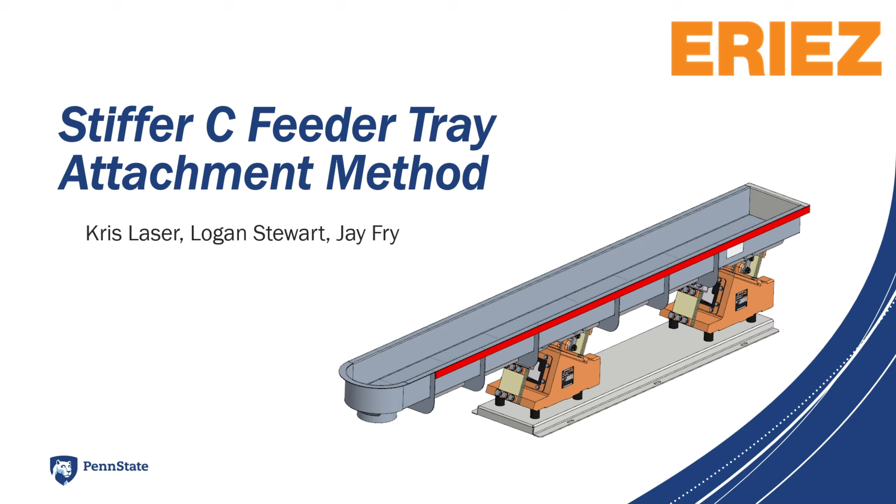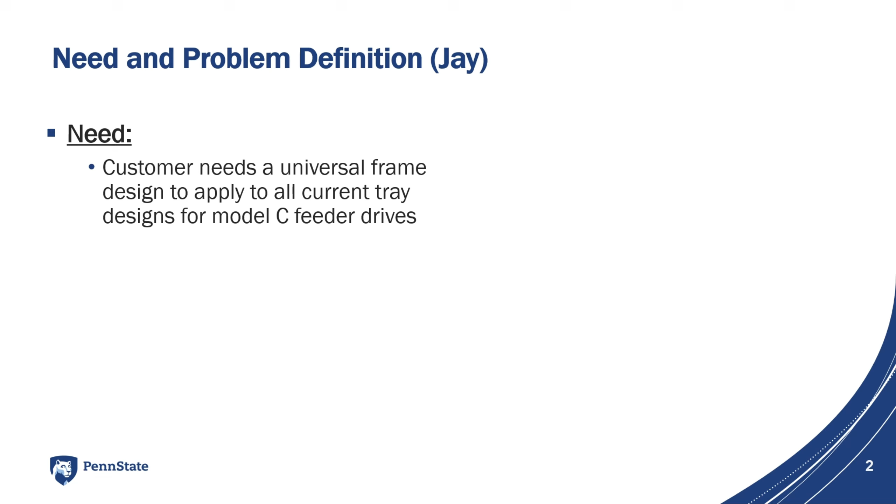The problem is that because the tray frame geometries vary, depending on the feeder, certain tray configurations end up with natural frequencies near that dangerous resonant peak. Each case requires individual engineering attention, which drives up labor costs and redesign time.

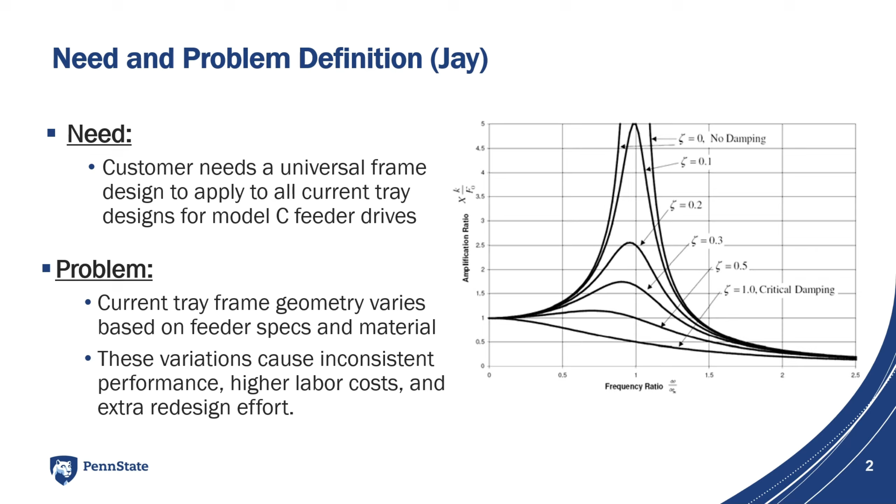The Model C feeder is an electromagnetic drive system. It uses an alternating current system to move particles or material to a specified place in a smooth but linear way. There are no belts or rotating parts, which is very important because it allows for little to no downtime due to maintenance. There aren't really any parts on the system that can wear out over time with use either.

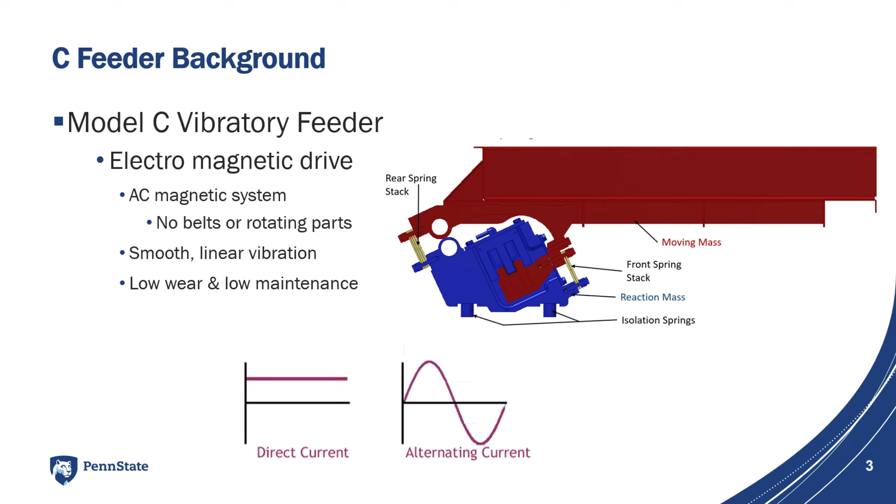Some things to point out on the picture to the right are the rear and front spring stacks. These springs are small sheet springs that are used to tune the feeder, in this case to 60 Hz. The tray itself is the large red piece on top of the blue drive. As shown in the animations below, the material moves in a smooth, linear consistency down the tray attached to the drive. The vibration is excited by using magnets inside of the drive that flip their polarity. This flip is what keeps the vibration smooth, thus allowing proper material flow.

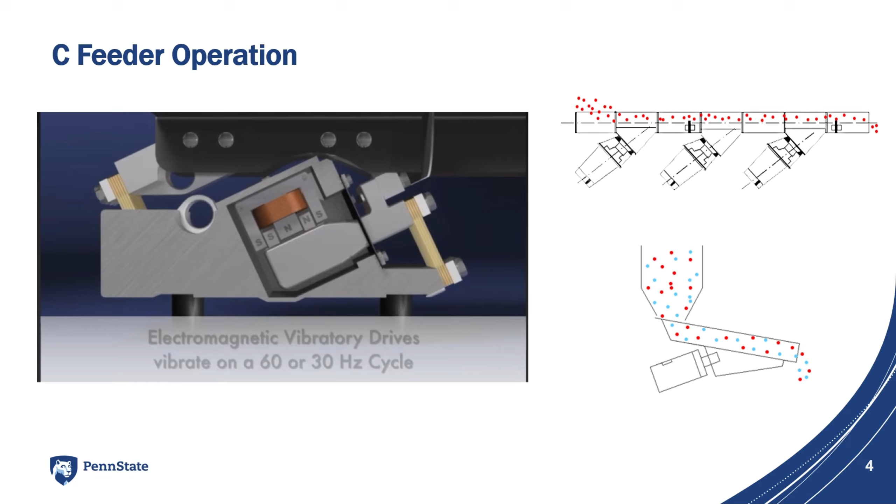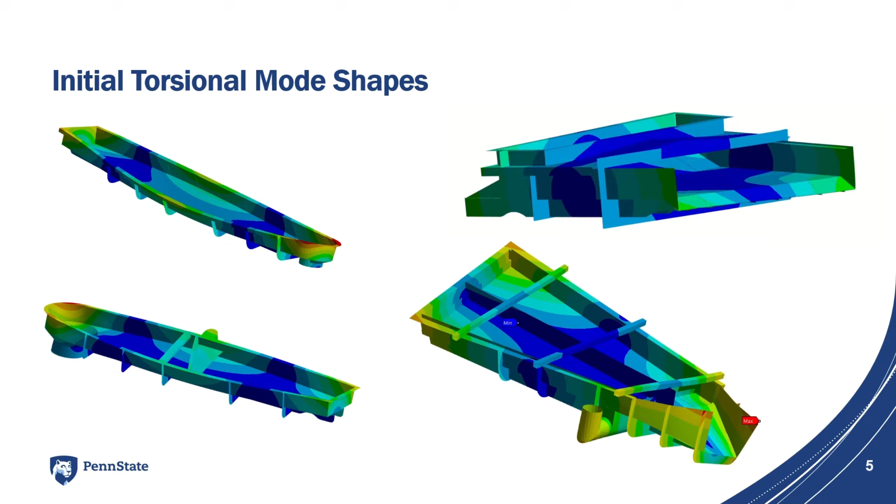As previously discussed, the primary issue identified in the original designs was that torsional modes were the main contributor to resonance. These modes occurred near the operating frequency, leading to unwanted twisting behavior. To address this, we introduced square tubing along the length of the tray. Because this tubing is a closed cross-section, it significantly improves torsional resistance compared to the original open geometry. This added stiffness helps reduce twisting and improves the overall dynamic behavior of the system.

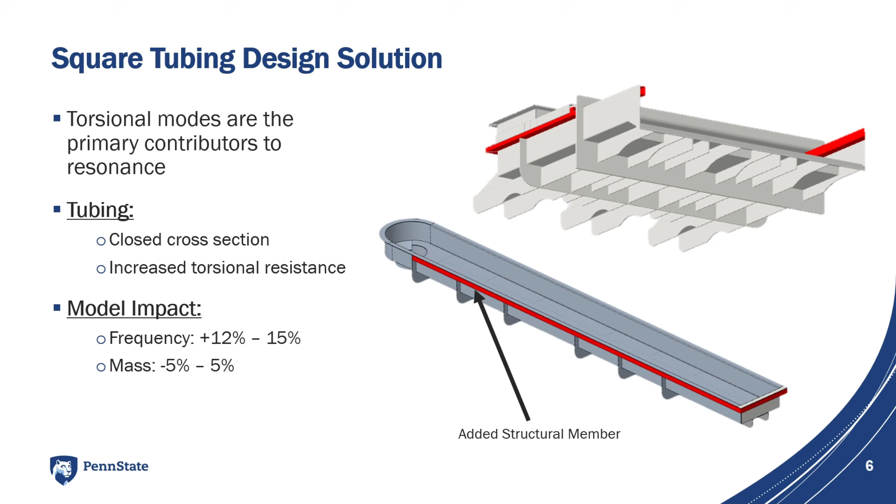Looking at the modal impact, we see an increase in natural frequency of approximately 12 to 15%, while the mass change remains minimal, within about plus or minus 5% of its original mass. It's important to note that these values are averages across all 4 problem trays, showing that the design is not only effective but also consistent across different configurations. The placement of the square tubing was based on regions of high stress and large deformation, ensuring that the added material contributes as efficiently as possible to stiffness.

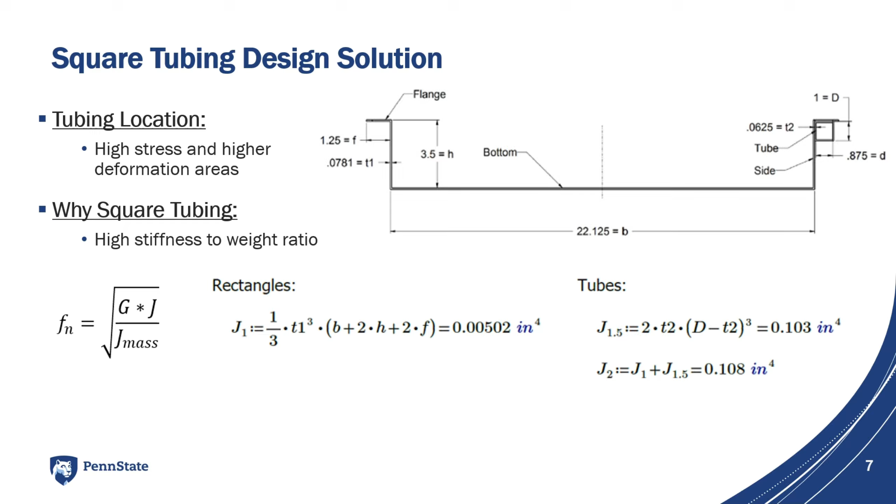From a dynamic perspective, the natural frequency is governed by the torsional rigidity, which is the product of the shear modulus and the torsional constant, divided by the mass moment of inertia. Since the material properties and mass remain nearly constant, the increase in natural frequency is primarily driven by the increase in the torsional constant, J. As shown here, the addition of the square tubing significantly increases the torsional constant compared to the original geometry, leading to a corresponding increase in torsional rigidity. Overall, this results in a higher natural frequency and effectively shifts the system away from resonance.

So now that we've walked through the engineering behind the square tubing solution, let's talk about why this design is practical to implement. First, it's easy to implement. The labor requirements are manageable. Square tubing is a standard, widely available material that's cost effective to cut and weld into existing trays. No special tooling, no exotic materials, no major changes to the existing manufacturing process.

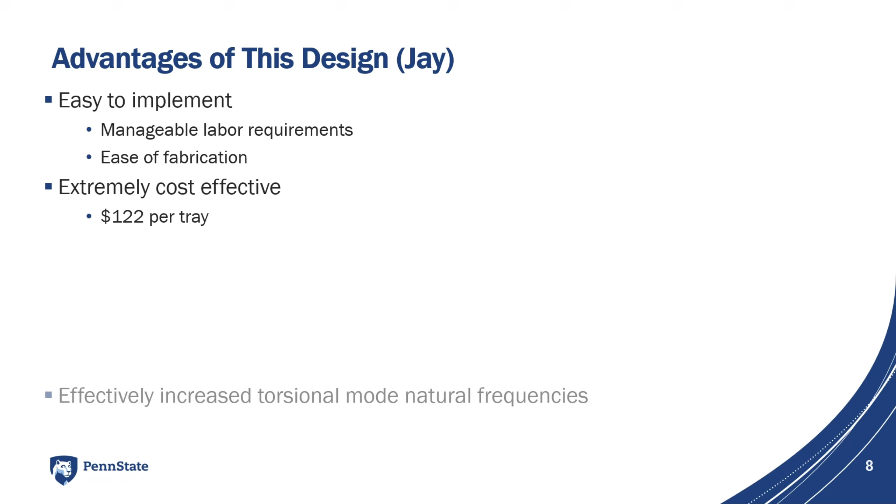Second, it's extremely cost effective. Breaking it down across our 4 tray designs, the total cost per tray, including material, cutting labor and welding labor ranges from about $72 to $158, with the average of all of them being just about $120. For the engineering improvement this delivers, that is a very low price to pay.

And the engineering improvement is the most important part. By adding this square tubing, we have increased the tray's torsional natural frequencies by 12 to 15%. That directly solves the core problem we identified at the start of this video. By pushing those natural frequencies higher and further away from the operating frequencies, we keep the frequency ratio well below 1, and as we saw on that response curve, staying away from the peaks means no destructive resonance, consistent vibration behavior, and predictable performance across every single tray design.

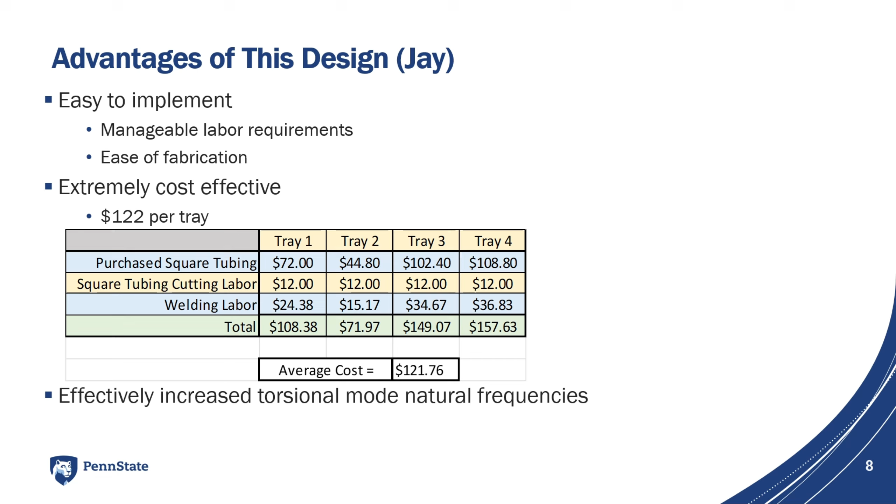So to summarize, this design is simple to fabricate, affordable to implement, and most importantly, it works. It gives Eriez the standardized, reliable tray frame performance they need across all applicable C-feeder trays.